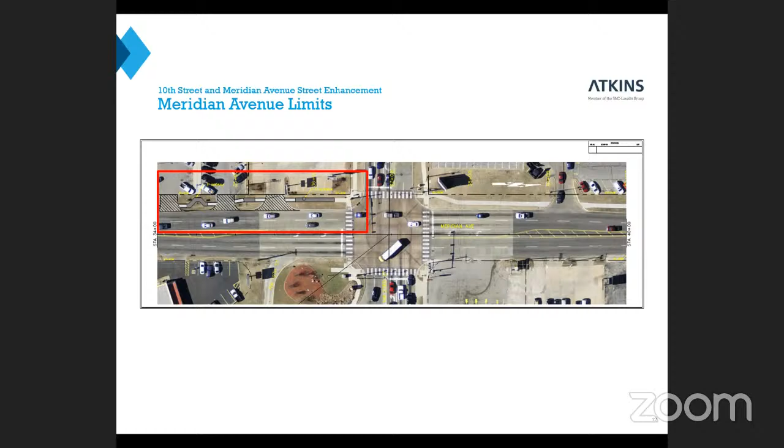We can, however, design a continuous sidewalk from Northwest 16th Street to the previously improved Northwest 23rd Street along the west side of Meridian. The continuity of this path will provide access to the Windsor Hills Shopping Center and the surrounding businesses at the 23rd Street intersection. The project would also provide access to the E.B. Jeffrey Park near the south end of the project at 16th Street, and will improve the east-west crossing on the south side for pedestrians. On the images you'll see on the next slide, the preferred pedestrian path is clearly defined in unpaved areas. This reinforces that this project will greatly improve accessibility for a large number of pedestrians.

Before beginning the design, we evaluated the possible right-of-way conflicts throughout the proposed limits. We believe there are 4 locations where the new facilities will have to be constructed outside of the existing right-of-way. 2 locations are driveways that are too steep, and the minimum slopes will require the driveways to extend further beyond the existing right-of-way. Typically, we're able to get right-of-way or right-of-entry agreements with property owners before construction. The other 2 parcels conflict with the proposed sidewalk and driveways. To continue making progress, we're working with planning staff to communicate with the business owners to discuss the right-of-way. At the same time, we've got surveyors researching easements with the Oklahoma County Assessor's Office to confirm there are no existing easements for the 7-Eleven and the car wash next to it.

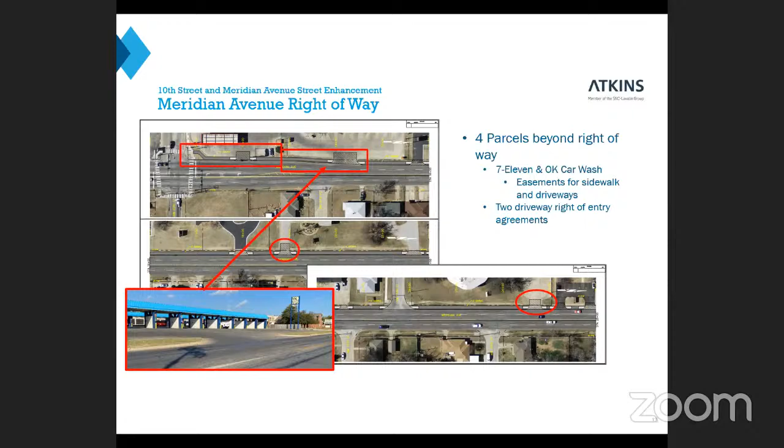The Northwest 10th Street project will be constructed as planned between Council Road and Rockwell Avenue. Sidewalk along the south side of 10th Street was previously constructed, so the sales tax project will complete the pedestrian facilities along this section of 10th Street. Similar to the Meridian project, this project will have some right-of-way conflicts and issues with utilities. However, we will also have to work around a small drainage area and design a new retaining wall.

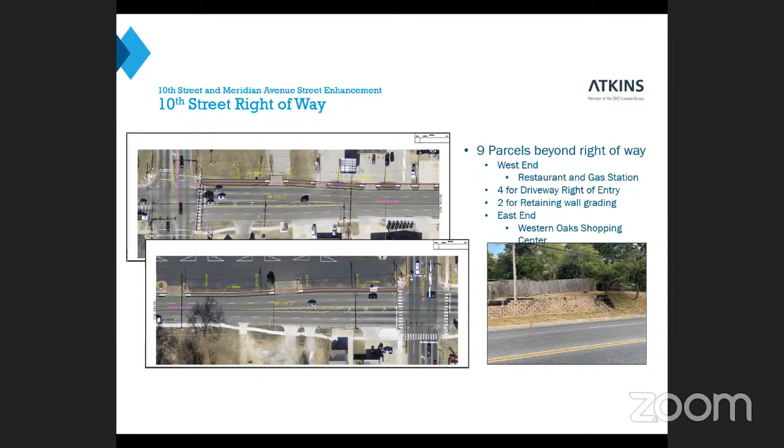This project has more right-of-way conflicts, but that was expected because the limits are longer than the Meridian project. The ends of the projects are at the already widened intersections, so the right-of-way will need to be extended to provide for the 5-foot sidewalk. We have started communication with the Western Oaks Shopping Center owner, and planning staff has reached out to the restaurant and the gas station on the Council Road end of the project. The retaining wall parcels will be contacted after we confirm that no right-of-way easements exist, and the parcels that only need driveways will be contacted after the next level of plans are developed to confirm the driveway setback distance.

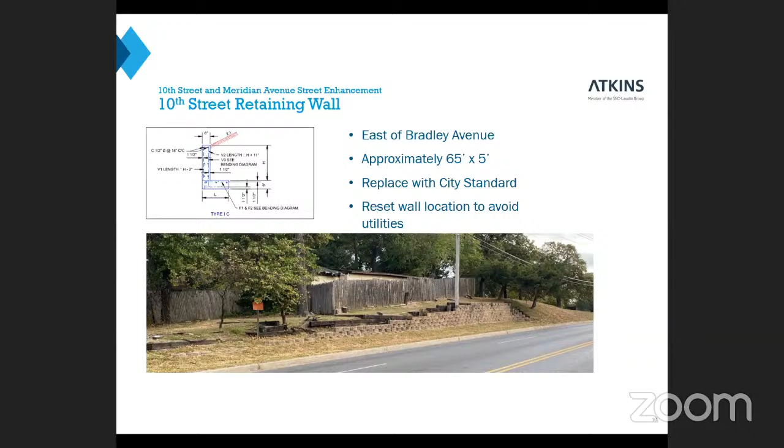The existing retaining wall is located east of Bradley Avenue. There are currently 2 walls in place, a wooden retaining wall, and in front of that, a stone block wall. Our design will use the city's standard retaining wall, but we will have to work with OG&E to make sure our design doesn't violate any of their engineering standards. As you can see on the slide, the retaining wall details show the footing constructed behind the wall. But if we run into any issues with OG&E, we can use a different standard that places the footing on the curb side of the wall.

The Meridian budget is $729,148, with a construction estimate of $359,356. We believe the right-of-way cost could be around $60,000, for a total proposed budget of $419,356. The 10th Street budget is $600,475, with a construction estimate of $632,908. We believe the right-of-way cost could be about $75,000, for a total proposed budget of $707,908.

And with that, if anybody has any questions I could answer.

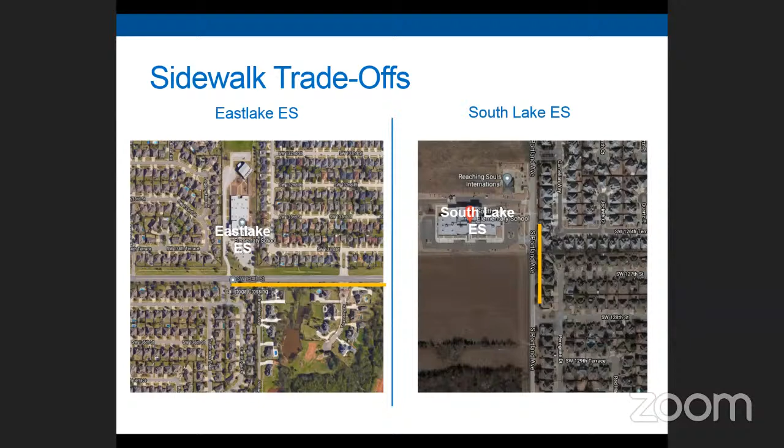You may have noticed a slight discrepancy in the numbers between the agenda and the implementation plan. We estimated the construction for the sidewalk to be about $40,000. Once this amount was added to the implementation budget sheet, the addition of soft costs for administration, testing, and contingency set the overall budget at $51,717. So there was a slight error in conveying this total between the agenda memo and the implementation budget, but the implementation budget sheet is the correct amount that we are recommending at this time for the South Lake Elementary School sidewalk. So with that said, that is our recommendation at this time.

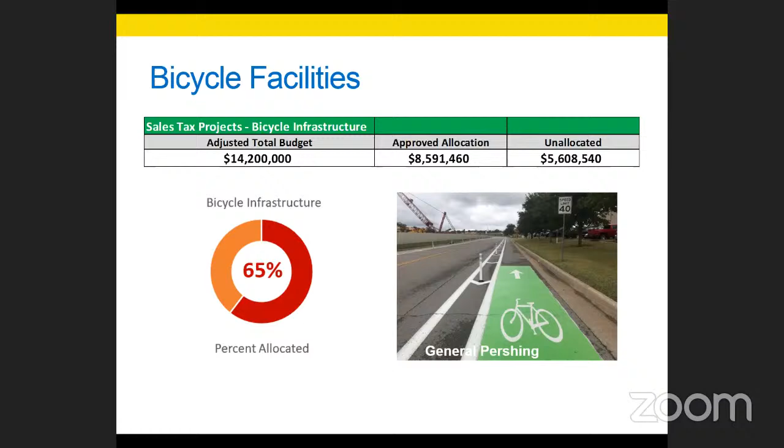We believe that all other bike projects are still in some state of design and review at this point. So I believe that's all I have at this time. Oh, I also will be bringing forward next month, we are looking at our next project to likely be the Lottie Avenue bike project. Thank you.

This project was recently submitted to ACOG, the Association of Central Oklahoma Governments, to receive congestion mitigation air quality funding. The application is due by next week, and we could possibly receive up to about $112,000 if granted the CMAQ award. CMAQ stands for Congestion Mitigation Air Quality.

This additional $112,000, if awarded, could go towards the construction of our Lottie Avenue project. This project is also currently underfunded with our sales tax monies. We do need to come back and request a budget adjustment of an additional $500,000.

So if the CMAQ project is awarded, that will help reduce that request of about $500,000. I wanted to bring that as an information item, to let you know that'll likely be the next bicycle project that hopefully will get moving forward relatively soon.

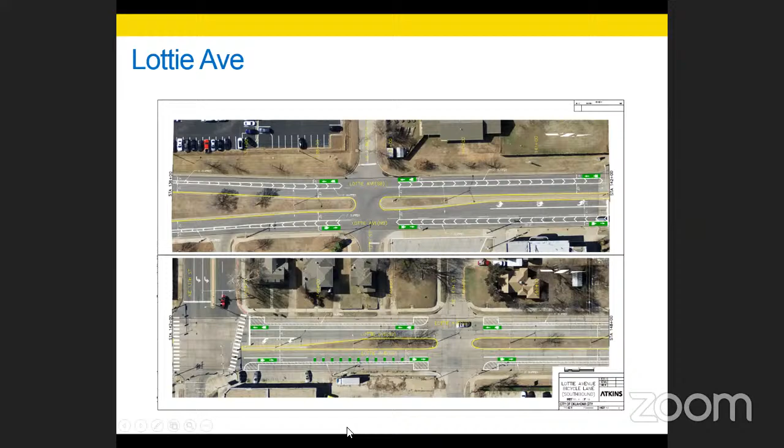Yes, thank you for that comment, and we will definitely communicate on that. Are there any other questions regarding the status of bicycle facility updates? Okay, hearing none, that completes my update at this time. Thank you, Mr. McKnight. Thank you, Lakeisha.

Appreciate that very much. Next item is 3E trails. Number one is... Brock. Oh sorry, this is Brock, I'll give the status construction update.

One item of note is that the Katy Trail, we have given the work order out and construction has started on that. Hopefully that will finish in a short time through the winter, and hopefully be completed by next spring. That's really all the updates I have for the projects in construction, if anybody has any questions.

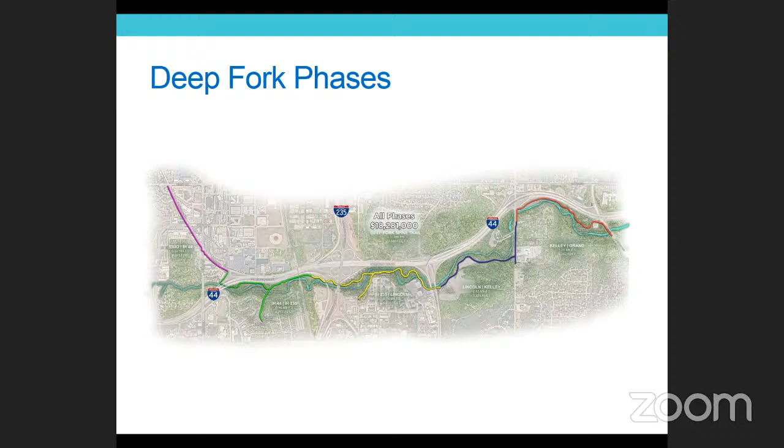We wanted to bring back to the committee this time the item that you heard last month about the Deep Fork Trail update for a funding request. Next slide please. As you can see from the trail, each of the phases has been estimated for its construction cost.

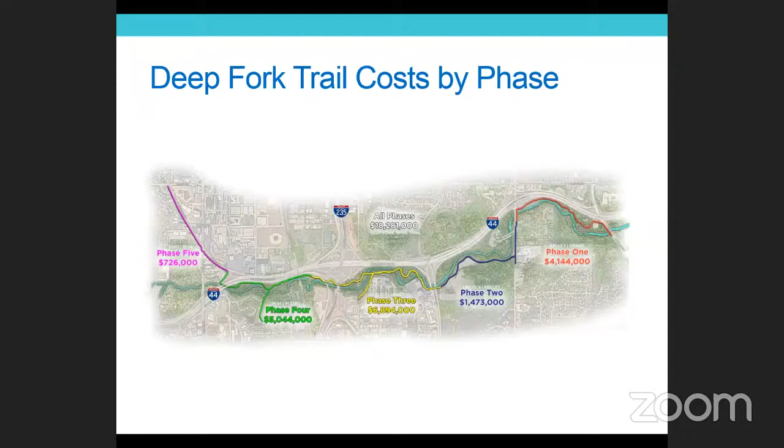Again, this is a project that will be led by ODOT. They are actually in their phases now of doing their NEPA studies and other last minute studies they have to do. So we're hoping that by next spring we'll have something more intact to bring back to you at that time. But in order to make this trail happen, we have proposed to the committee the addition of $8 million added to the project cost.

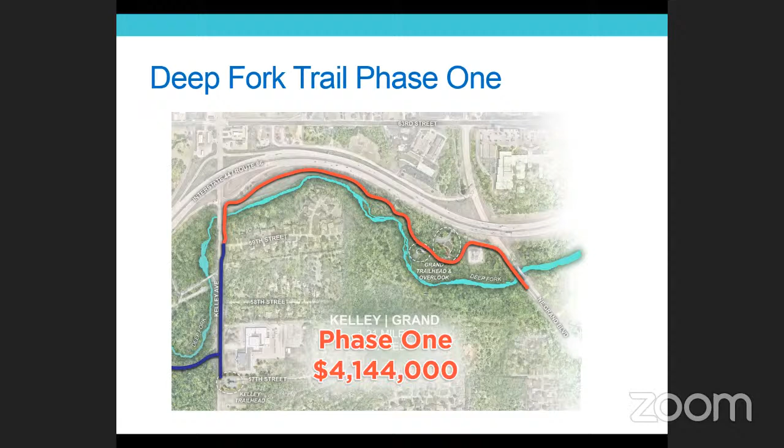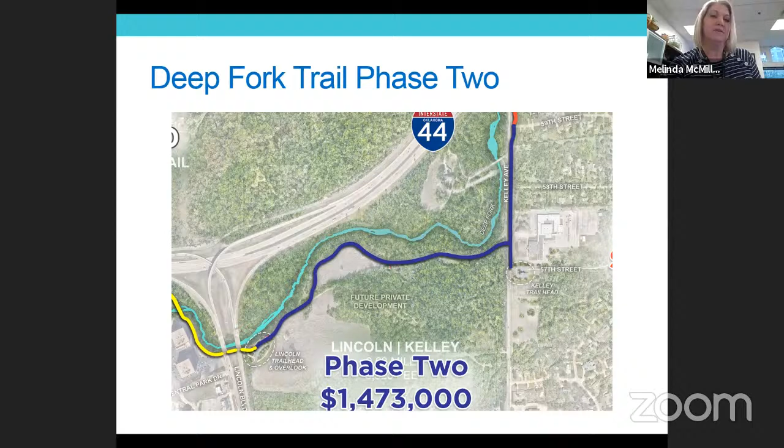Next slide please, and we can just keep rolling the slides if you don't mind. Again, phase one was that connection between Grand Boulevard and Kelley Avenue. Next slide. From Kelley Avenue to Lincoln Boulevard will be phase two, which will go through a lot of deeply wooded areas just south of the Deep Fork River. Phase three is the connection from Lincoln Boulevard through the interchange of I-235.

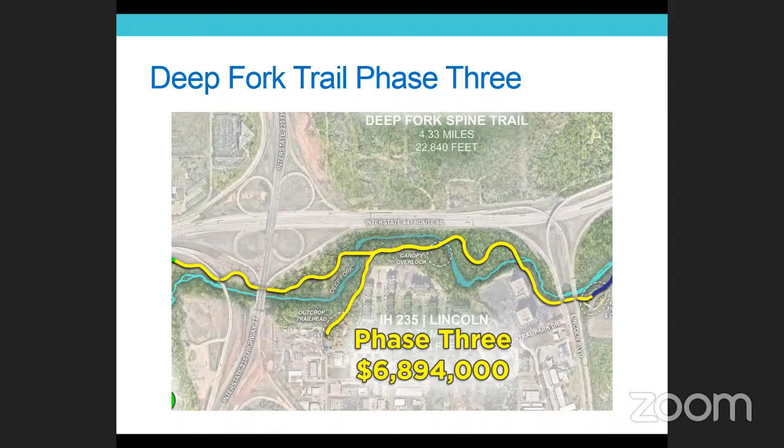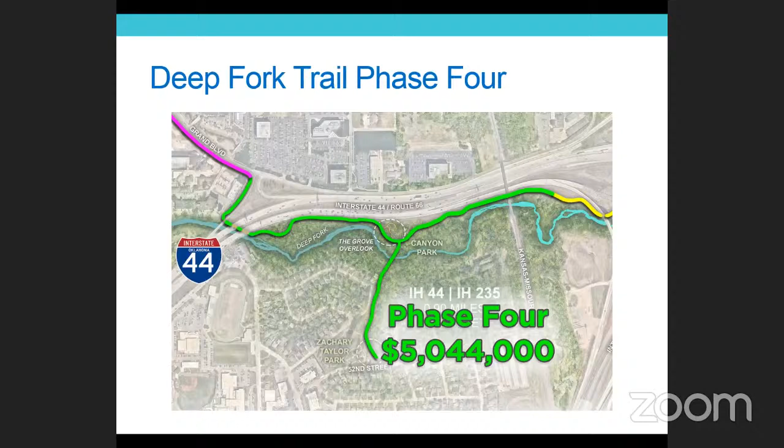And then phase four will connect there, pick up again just west of I-235, and go through an area we've already dubbed Canyon Park, that will connect down to Zachary Taylor Park and come out underneath I-44 spur over there and up to Grand Boulevard. And then phase five will be the back of curb connection from Grand Boulevard up to Nichols Hills.

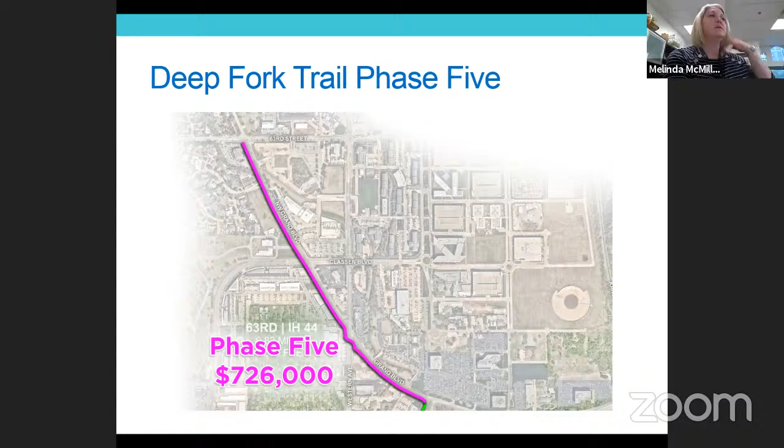So the 5 phases altogether is a very large budget, of course, but we're hoping that our bids come in well, and with the additional $8 million, if the committee approves it added to this project, it will be a very large benefit to making this actual project happen. Are there any questions about the project from the committee?

I have a few questions about this, and actually the previous report as well, but let's start with this one. Deep Fork — so is this all taking place on publicly owned land or right of way? It sounds like we are creating sort of park land, at least I guess, in that you talked about the Canyon Park and some of the overlooks. So is that all on public land?

The majority is, and we are going after right of way in a couple of locations. Public Works can speak more clearly about those exact locations of where the right of way comes into play, or where ODOT property is impacted a lot with this trail too. So it's kind of a mixture between needing to seek some right of way, ODOT properties, and the city's properties all combined. A lot of different locations — it's really a hodgepodge of how it's all connected.

But all government entities, like there's not any land acquisition that is anticipated to take place. That's correct, sir. There's no land acquisition that we need to do with this. We were looking at that at one time with one of the routes, but it was going to add more cost to the project.